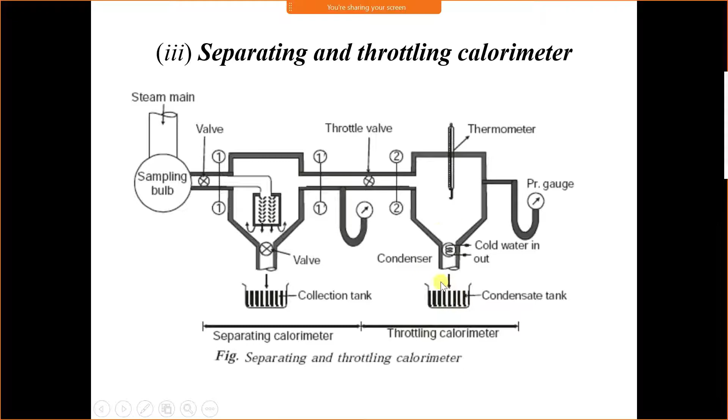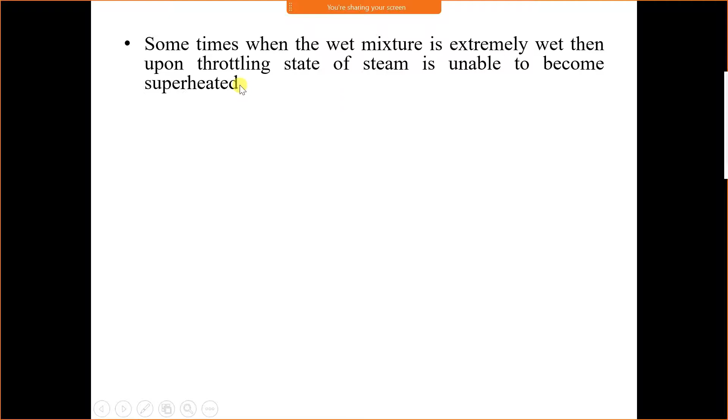Let's look at the theory of combined separating and throttling calorimeter. Sometimes when the wet steam is highly wet, then upon throttling, steam is unable to become superheated. In such situation, mixture is first passed through separating calorimeter to reduce liquid fraction in it, and subsequently this less wet mixture is passed through the throttling calorimeter, so that liquid part can be removed.

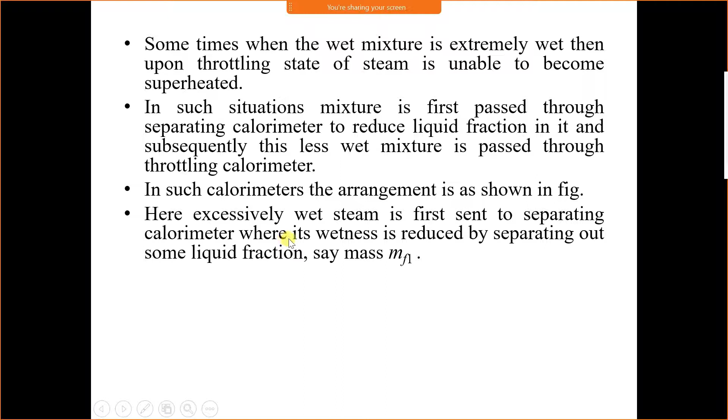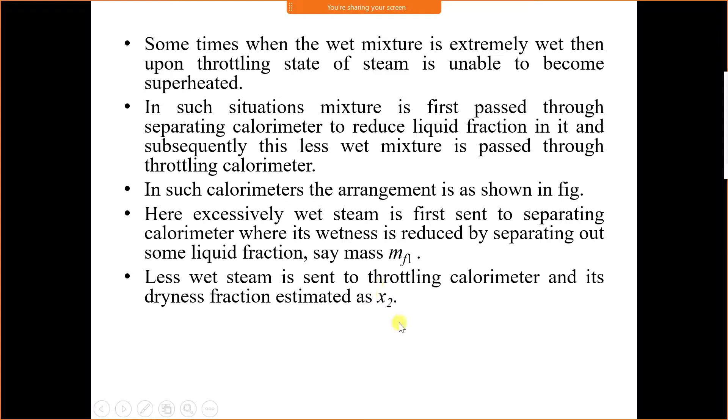In such calorimeters, the arrangement is shown in the figure. Here, excessively wet steam is first sent to separating calorimeter, where its wetness is reduced by separating out some liquid fractions. The amount of liquid collected in the separating calorimeter is considered as mf1. Less wet steam is sent to the throttling calorimeter and its dryness fraction is estimated as x2, the dryness fraction of wet steam entering the throttling calorimeter.

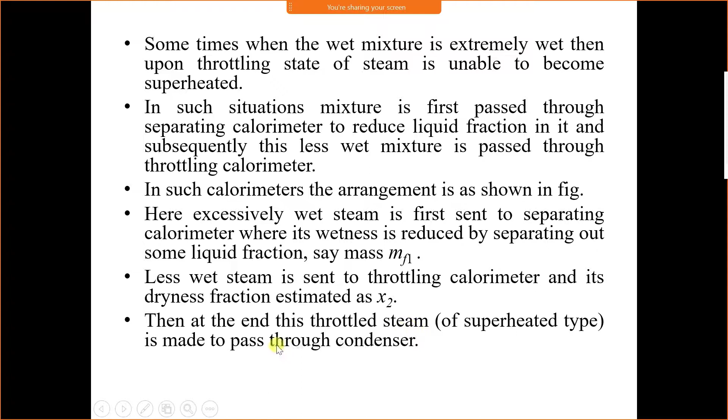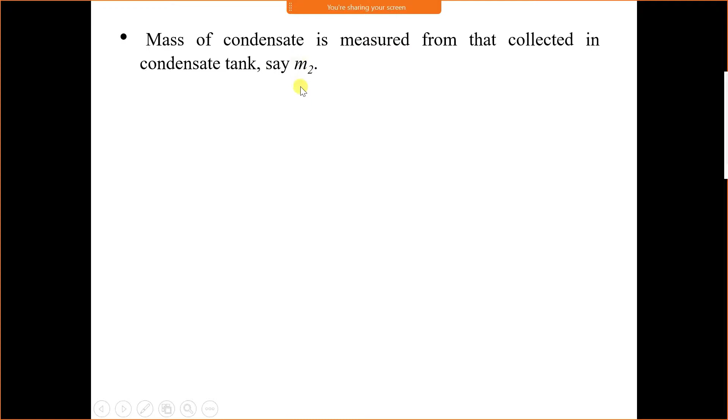Then at the end, this throttled steam is made to pass through condenser where its mass is collected, and the mass of condensate measured from the collected condensate tank is m2. The mass of water collected in the throttling calorimeter is m2. Thus, m2 is the total mass of steam sent from the separating calorimeter to the throttling calorimeter.

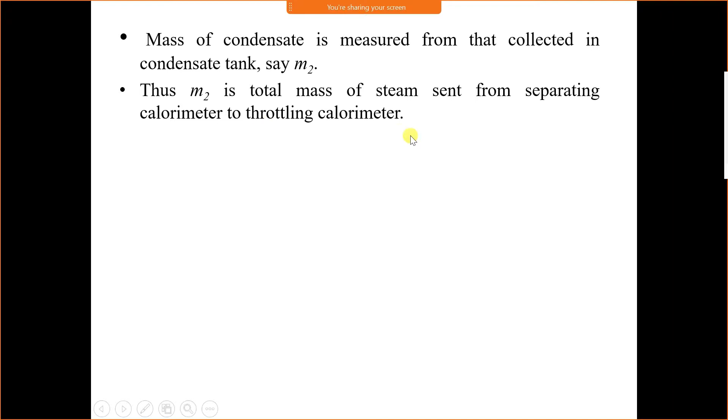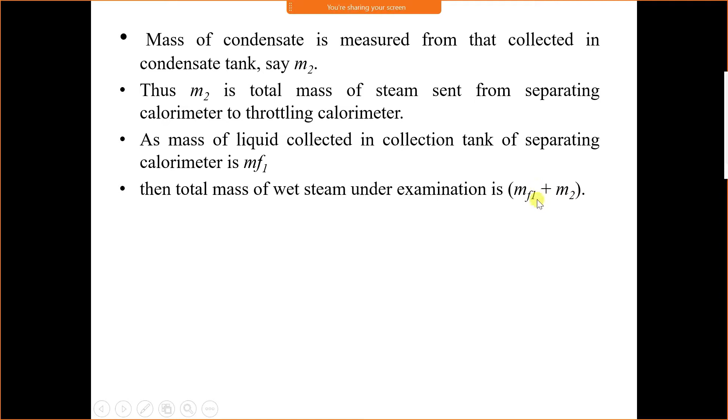As the mass of liquid collected in a separating calorimeter is mf1, the total mass of wet steam under examination will be mf1 plus m2. Therefore, total mass is equal to mf1 plus m2. The dryness fraction at section 1 shall be x1, equal to mass of vapor upon total mass. This is the formula for separating calorimeter.

Mass of vapor at section 1 shall be similar to the mass of vapor entering section 2. Therefore, mass of vapor at section 2 will be equal to x2 into m2. I am not talking about mass of liquid, mass of vapor is x2 into m2. Therefore, dryness fraction x1 is equal to mass of vapor upon total mass: mass of vapor is x2 into m2 and total mass is mf1 plus m2.